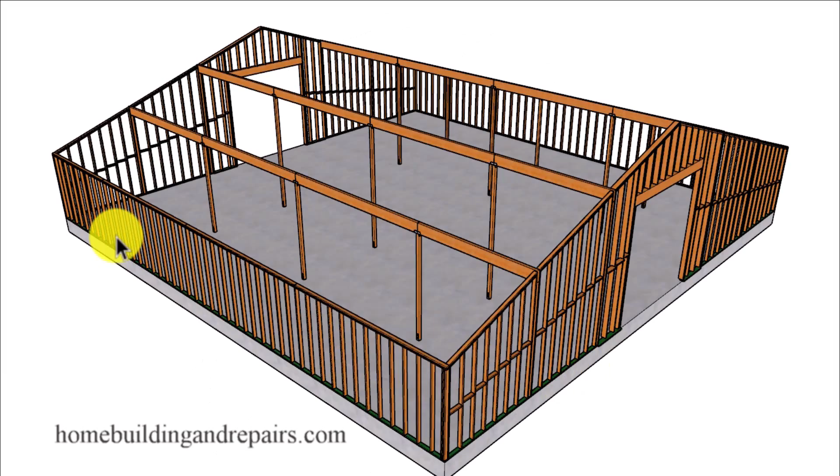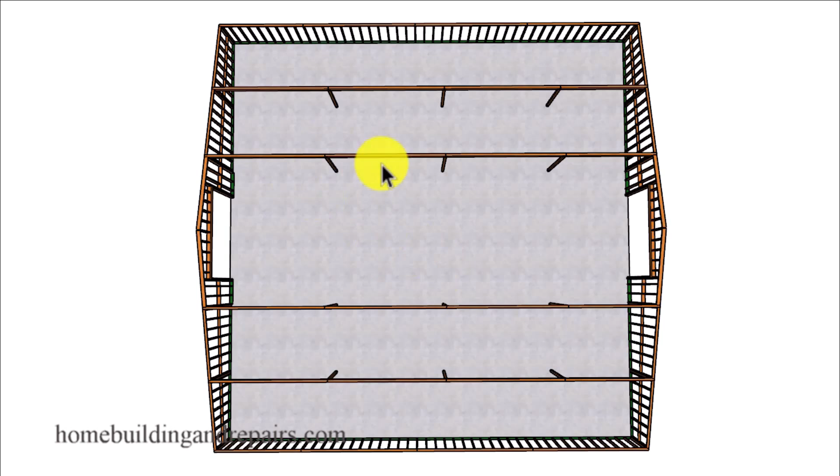What I would suggest would be to build a building in 2 or 4 foot increments, and preferably 4-foot increments. What we have here is the building I previously did in this series on designing and framing large buildings, where we have 3 16-foot beams and then a 12-foot beam to create our 60-foot long building. I'm not suggesting you change a design you like to fit this,

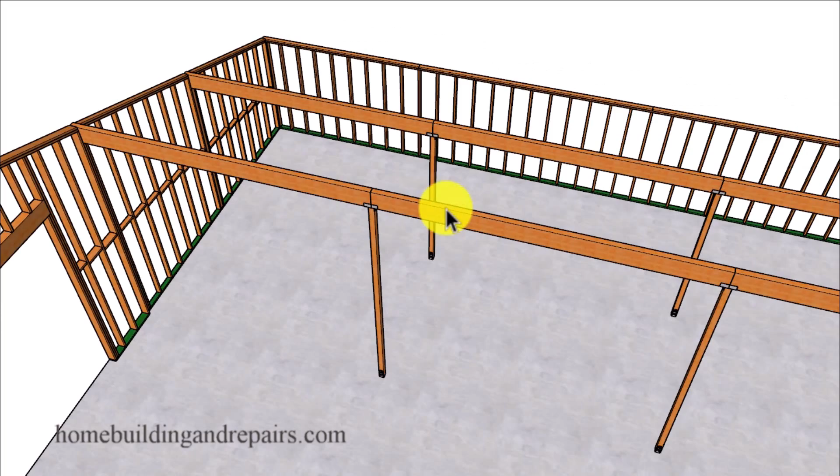just something to consider, and definitely something I consider on almost every type of project I work on. In some situations, if your beams are the right size, exactly 16 feet, exactly 12 feet long, then you won't have to cut these beams either. And if you don't have a large beam saw, when dealing with some of the larger lumber, this could actually be another benefit.

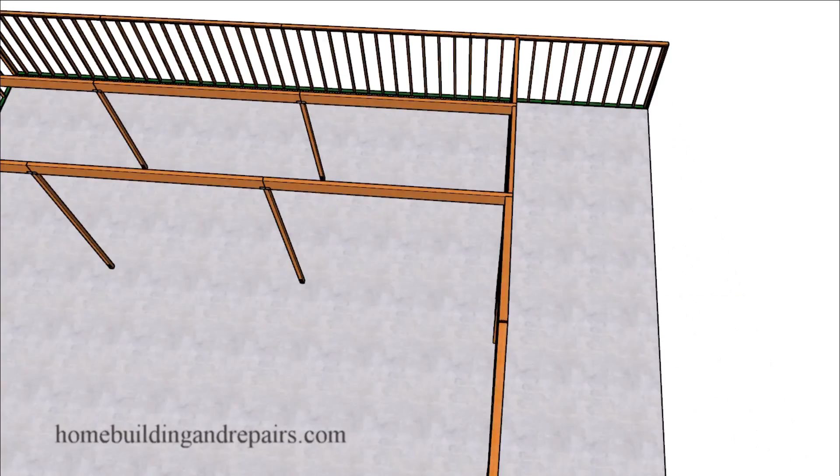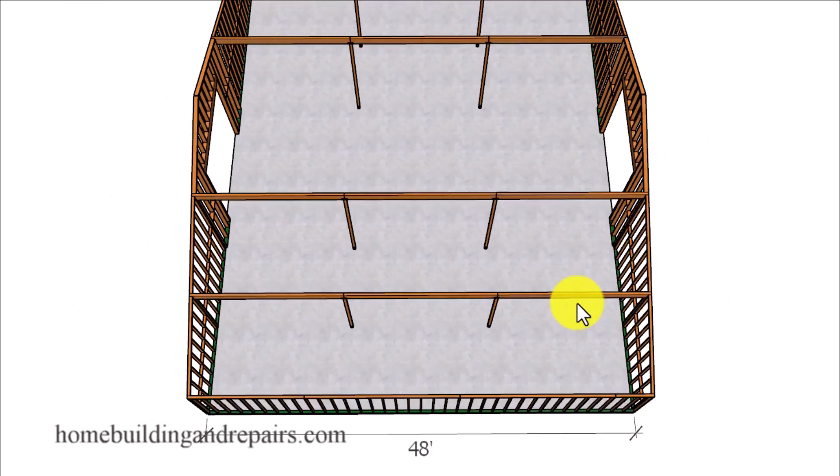So let's go ahead and move the wall in 12 feet to make a smaller building, something that will have 3 16-foot beams in it. Let's go ahead and finish off the exterior of the building just to provide you with what a building would look like. That's 48 feet long and using equal length structural beams along with a longer building.

Again, all I'm doing is using the same length beams, same length posts to determine the length of the building. 80 feet and not 79 feet or 77 feet, where I might have additional unnecessary waste, that could allow you to get a few more feet.

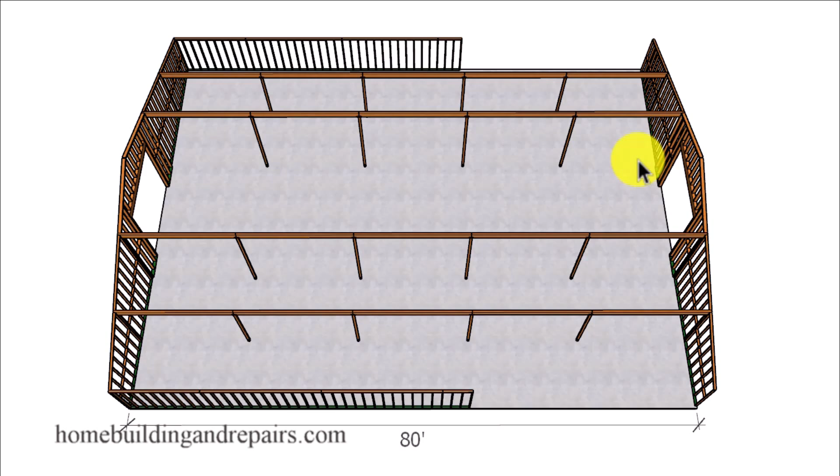Now, I'm not suggesting that you're not going to need more concrete, more lumber, or more roofing materials, but I am suggesting that you might be able to pick up a few more feet or reduce the length of the building a few feet to make something like this fit into your budget a little better, or provide you with more square footage, whatever is going to work better for you.